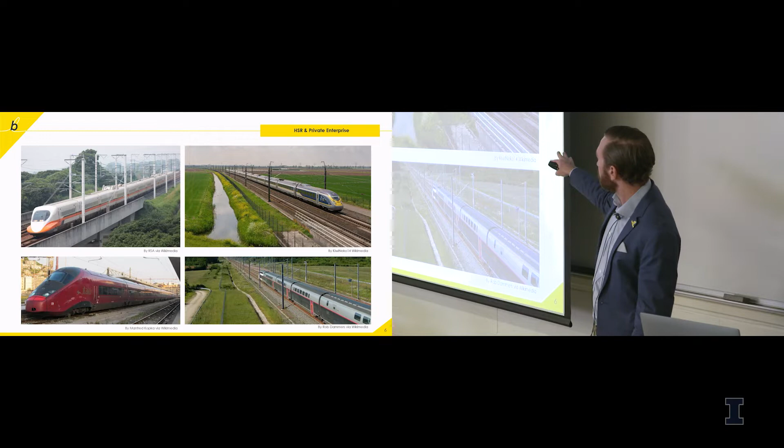Top left is Taiwan High-Speed Rail, which TC had a huge part in building. But some of these other projects also have major private components. This is the InfraSpeed line connecting the Netherlands and Belgium, built and operated by a private consortium. Same deal on the bottom right, the Tours-Bordeaux high-speed line in France, built and operated by a private company that charges tolls or track access fees to SNCF and other private high-speed rail operators that want to use it. And in the bottom left is Italo, a private company that operates trains on national infrastructure in Italy.

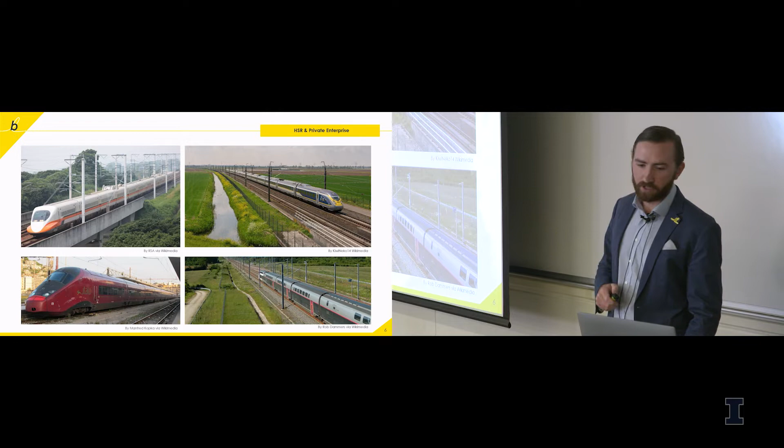Another theme from TC's courses was transit-oriented development, and how the arrival of high-speed rail in a community can really revolutionize a downtown area or develop a new one. That's something we've taken to heart at Brightline.

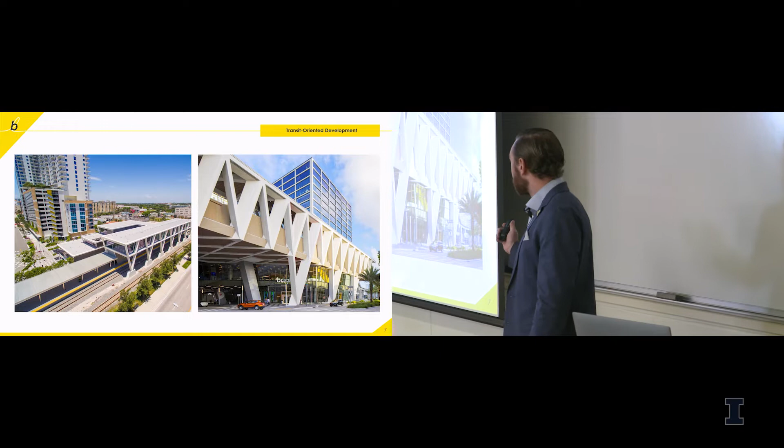On the left is our West Palm Beach station. The station's in the foreground, and in the background is a high-rise apartment building we built on land adjacent to the station that we own. So we can be not only your transportation provider, but also your landlord if you want. On the right is our Miami Central station, one of three towers that's an overbuild over that station, an office tower I'll talk more about.

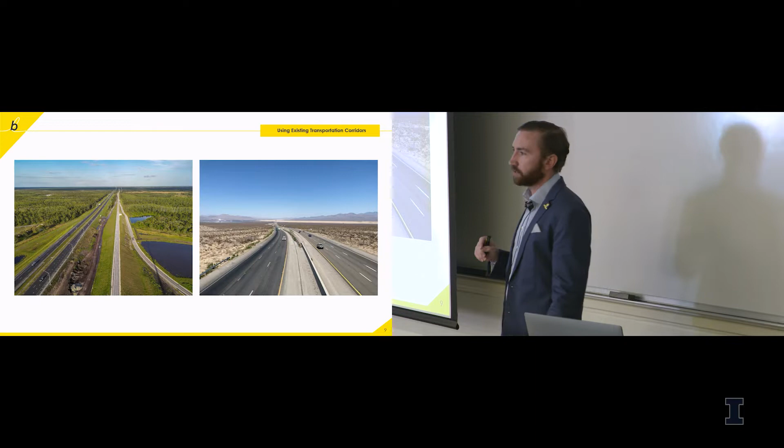On the right is the Interstate 15 corridor, connecting Las Vegas and Southern California, where we intend to build our Brightline West project, again following an existing transportation corridor so we only have one major property owner to work with. In fact, we just announced last week that the one mile of our project not in the I-15 corridor was acquired. So we're now 100% done with land acquisition for Brightline West, a huge step. We're the only high-speed rail project in the country completely done with land acquisition, which is part of what makes us able to truly say we are construction ready, shovel ready.

So let's dive into Brightline Florida a little bit, starting with phase 1, the operation we're currently running. As Chris said, we started in 2018 between Miami and West Palm Beach. This is a 67-mile route with 178 grade crossings, and we're operating today with 34 to 36 trains a day, hourly departures in each direction between Miami, Fort Lauderdale, and West Palm Beach.

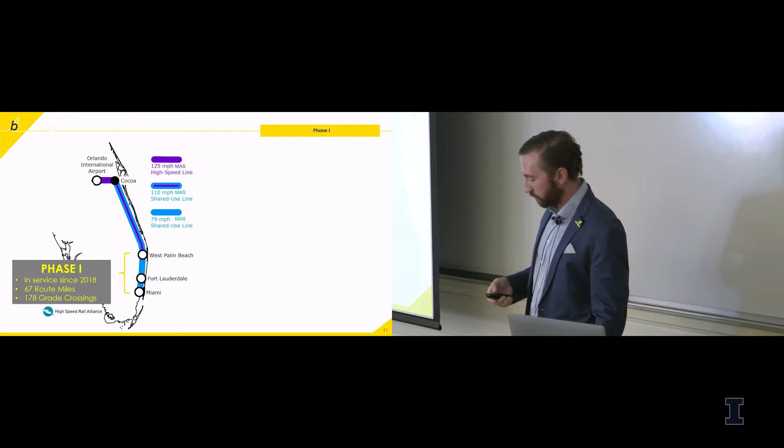Like I said, we're typically operating our trains with 4 coaches. One is the premium coach, which has a 2x1 seating configuration. The ticket in premium includes free snacks and drinks for the guests, and there are premium lounges in each station that also have buffet food and plenty of drinks.

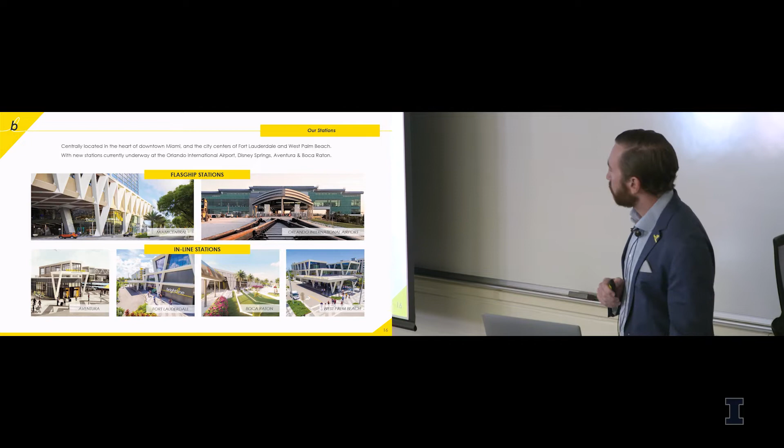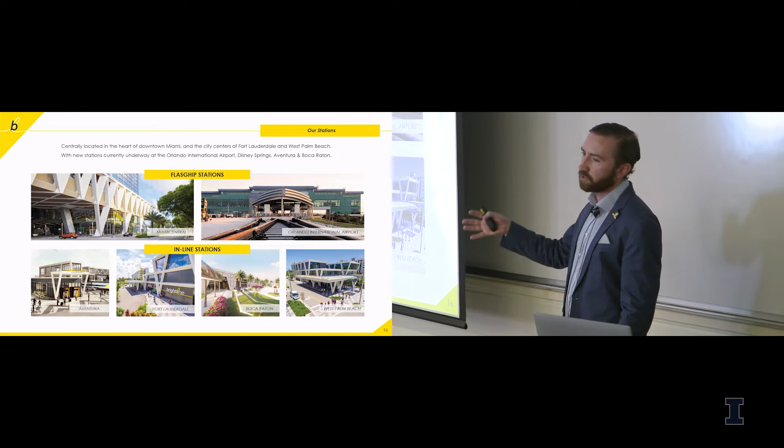Speaking of stations, these are great trains, but we connect great stations using those trains. Right now, Miami Central, Fort Lauderdale, and West Palm Beach stations are in operation. We're in the process of adding 2 inline stations, one at Aventura, Florida, on the northern part of Miami-Dade County between Miami and Fort Lauderdale, and another inline station at Boca Raton, between Fort Lauderdale and West Palm Beach. Both of these stations should be done at the end of the year. And of course, we're also extending to Orlando, and that station will open next year when our extension is complete.

We do have ticket gates for our trains, so for safety and security reasons we can keep a close track of who's on the train in case an incident occurs. We also have what I'd call Security Light, a baggage scanner for folks' carry-on bags that checks for firearms and weapons and things like that to keep our customers on the train safe. You can also check luggage on our train if you prefer.

So that's our operation in phase 1 - again, operating today, hourly frequencies in both directions. You are more than welcome to come down and visit. I'd love to see you on board, and we'd be happy to host you anytime if you want to come check it out. But now I'm going to switch gears and talk a little bit about phase 2, our expansion to Orlando.

Phase 2 is a $2.7 billion investment. As of this week, I think we're at 84.4% complete. We've worked over 6 million man hours on the project so far, and we've got 1,000+ headcount on the job every day.

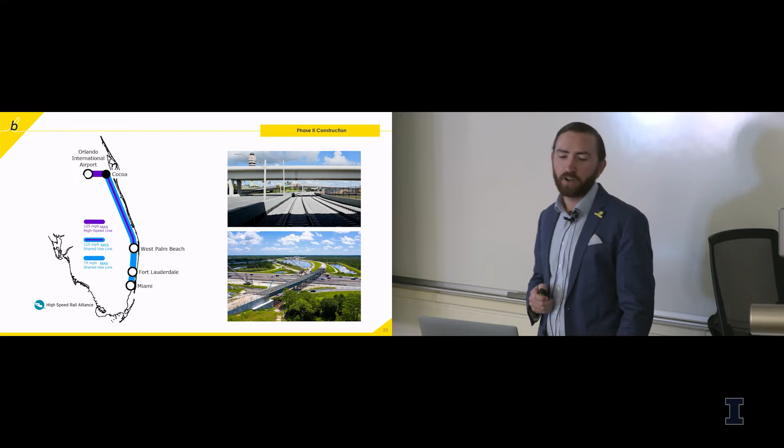Looking at the map, I like to use this high-speed rail lines map because it shows the train speeds and which parts of the corridor are shared. Starting at the north end at the final destination, Orlando International Airport, the first part of the project is split into 3 zones that we call zones 1, 2, and 3, currently under construction. Together they're about 40 route miles, and this is new build with train speeds of up to 125 miles an hour, meaning it has no public grade crossings. We can't operate through public grade crossings at speeds above 110.

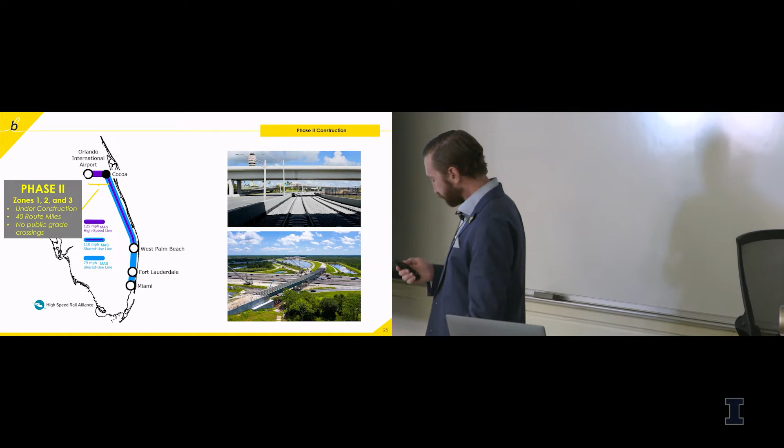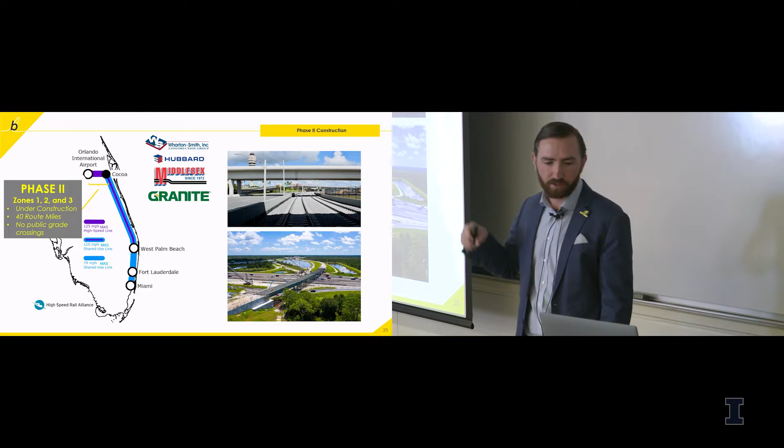Our main contractors for that work - for Zone 1, the vehicle maintenance facility where our trains will be maintained, Hubbard did the grading work and Wharton Smith did the vertical construction. For Zone 2, which is the track through the airport, that was built by Middlesex. And Zone 3, the actual higher speed portion from the airport over to Cocoa, about 36-37 miles, was built by Granite.

Servicing. This facility also has a fuel farm, sanding facility, wheel truer, and a locomotive repair track that has a crane capable of installing and removing the prime movers for the locomotives, the Cummins engines. So it's really everything you need to maintain a top-notch high-speed rail fleet.

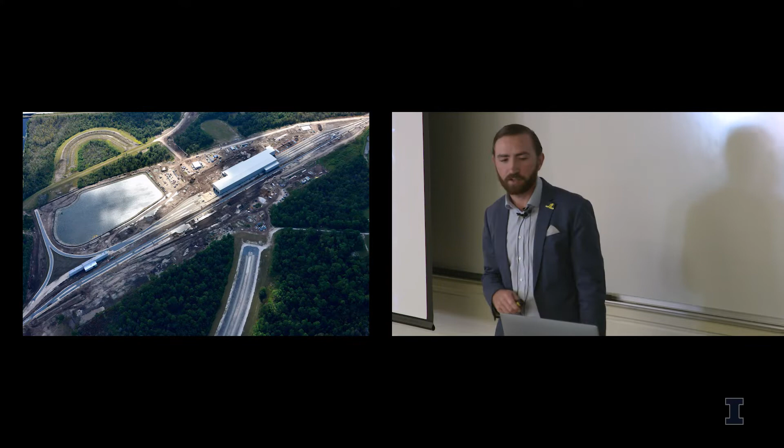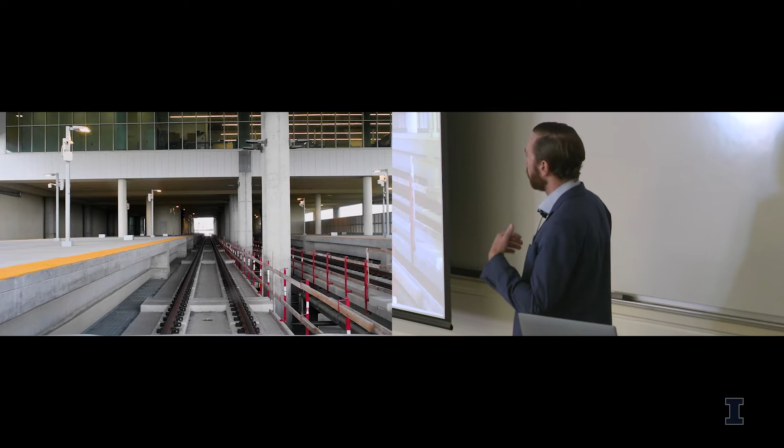Here's a photo of the track through the airport station itself. This is just when construction was being completed. Now we're working on the decorative finishes for both the platform as well as the station area and lounge. So this will look a lot different if you come down and ride next year when we're done.

Zone 2 is again the track through the airport. This is the track leaving. This is the train station here on the left in the background, leaving, coming to the north to head to the 528 expressway. Also in the background is a new Terminal C for the Orlando airport. This terminal is brand new, they just opened last month, and has a direct connection to our train station.

The airport, which is run by the Greater Orlando Aviation Authority, has been a fantastic partner that really has a vision for both intercity and local rail in Orlando. And so they actually built most of the train station. We only had to build the track part of it essentially. And they've had a vision for a rail connection to the rest of the state from their airport for a long time. Our agreement with them basically allows us to build the track through their airport in exchange for us also building a wide enough guideway to accommodate commuter and light rail in the future.

And so this grassy area you can actually see here is set, and where we're standing has the structures, the bridges and tunnels in place to add commuter and light rail in the future. So this is really going to become a multimodal hub for Central Florida once our train service opens and once those future local rail projects are constructed.

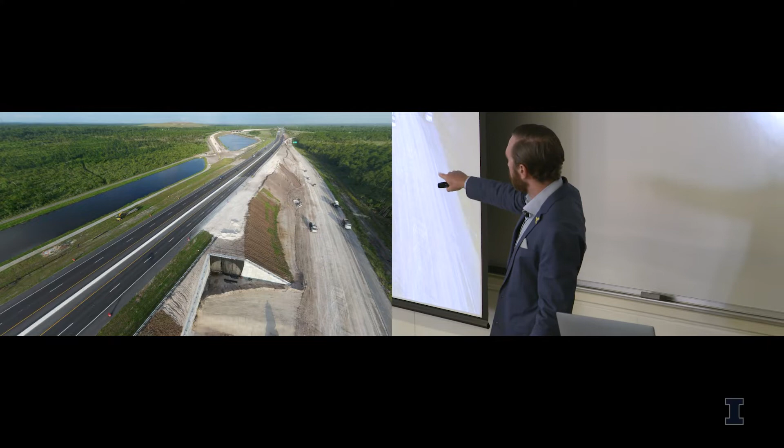Something else unique about Zone 3 is some of these structures that we've had to build to cross over or under freeways. So this is an arch tunnel where we will fly underneath the 528 freeway, and then in the background is a bridge over Interstate 95. It's quite a process to build some of these structures.

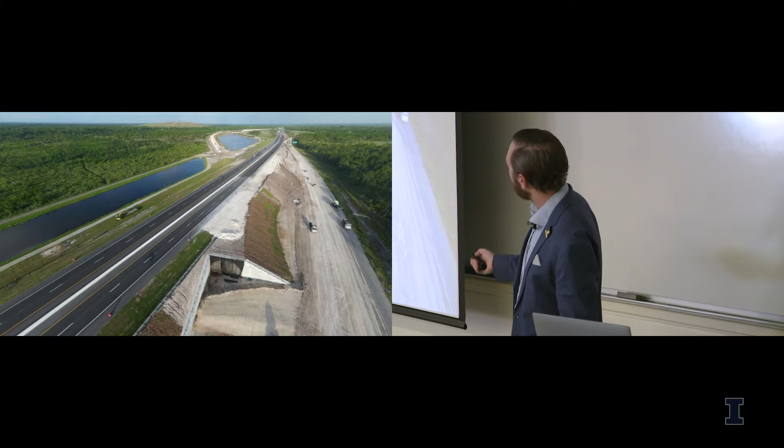On the far right you can see this compacted fill area where we actually built the shoofly for the freeway. The highway lanes temporarily ran here while we built this tunnel, and then this photo was taken just after we paved the new lanes over the tunnel. So now the highway is again in its final configuration, and it's all ready for us to build track underneath.

So that's zones 1, 2, and 3. The rest of the presentation I'm going to focus on what I'm working on mainly, which is zone 4. That's the biggest piece of the phase 2 expansion.

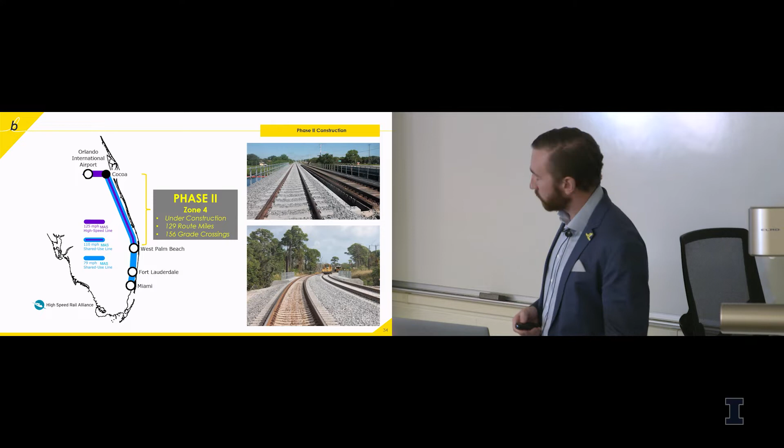It's 129 route miles, and this is the project double tracking the existing Florida East Coast Railway corridor between West Palm Beach and Cocoa. It's 156 grade crossings, which I'll talk more about, and we'll be able to operate at maximum speeds of 110 miles an hour on this corridor.

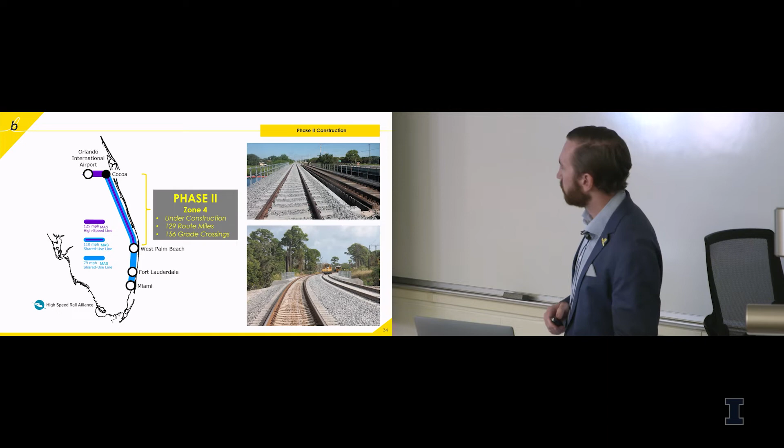And again, we are double tracking essentially the entire thing. There's only a few thousand feet over a very long bridge in Stuart, Florida that we can't double track. So there'll be one short piece of single track, and the entire rest of the line from Cocoa to Miami will be double track when we're done, and in some cases triple track.

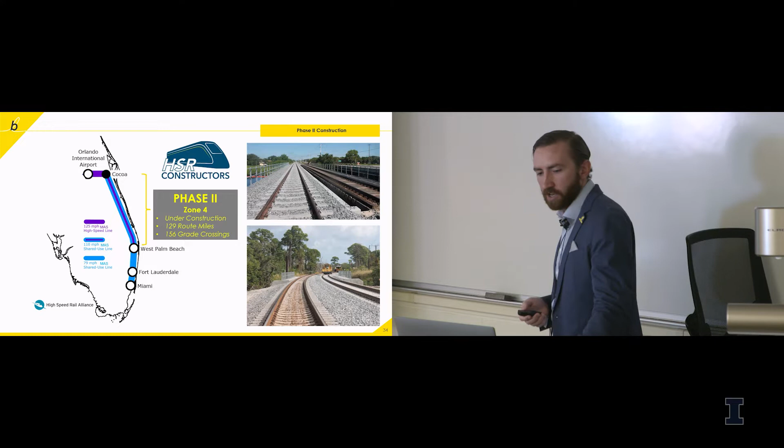This work is being done primarily by HSR Constructors, a joint venture of Herzog, Stacy and Witbeck, and Railworks. Those are three major track construction contractors in the U.S., and they're building that piece as well as doing the track work for Granite from Cocoa to Orlando.

So jumping into Zone 4, I want to cover a couple different aspects: first the track work, then we'll talk a little bit about grade crossings and a little bit about bridges. Again, this is what I work on day to day, so I'm most excited to talk about it. Also, I know there's some students in here who are taking the Shared Rail Corridor class, so I figured it's timely to dive into a little more detail on that.

I did speak at the TIE Symposium in April or May, and that presentation is on YouTube, so I don't want to duplicate what some in the room have already heard. If you're interested in learning more about the quantity of ballast, ties, fastenings and things like that we're using for the project, I'd encourage you to go to the RailTEC YouTube and watch that video.

Because I'm not going to cover it again here. Instead, I want to talk more about some of the unique things we're doing because we're working on a shared rail corridor that we wouldn't be doing otherwise for this project.

So just to give you the high level of what's going on, we're dealing with one existing Florida East Coast Railway track. Again, it's a single track route with passing sidings. To get from Class 4, where they currently operate, to Class 6, which is what we need for 110 miles an hour, we have to rehab that track.

So we'll do tie replacement, spot tie replacement, installing new ties, replace rail where we need to, replace fastenings where we need to, and then build that new second track, which is what you see there on the left. That's got all new ties, 136 RE rail, and new ballast.

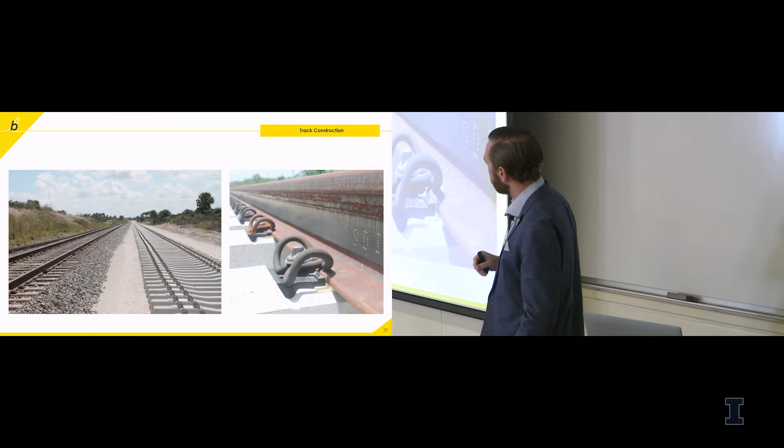Basically, we compact the subgrade, add the subballast, compact that. We lay out ties, usually with the tie dragon. And you can see in the far left of this photo, there's some CWR rail laid out that's been dropped by the rail train in advance. The next step is for a speed swing to come, thread that rail over, and we'll clip the new rail to the ties so that you have skeleton track.

Once the track is skeletonized, the next step is to bring the work train in with ballast, place ballast on the skeleton track, and then surface it up to its final elevation or configuration. I don't have a picture, but actually the most important step is the de-stressing, which sets the rail at the right neutral temperature once you have the track at its final alignment.

Pulled a couple screenshots from the track chart. I know this is a lot, but I want to point to one specific area. This orange line at the top is the existing condition of the Florida East Coast track before we started construction. You can see it's all single track.

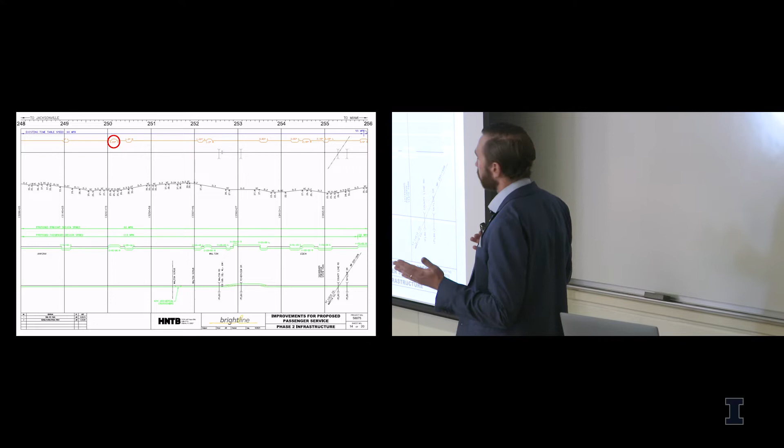Right here is a very typical location where we have a 2-degree curve. 2 degrees of curvature is too much for us to operate at 110, so we need to reduce the curvature. You can see circled there below, we need to make the curve a 45-minute curve, so that's about 3/4 of a degree.

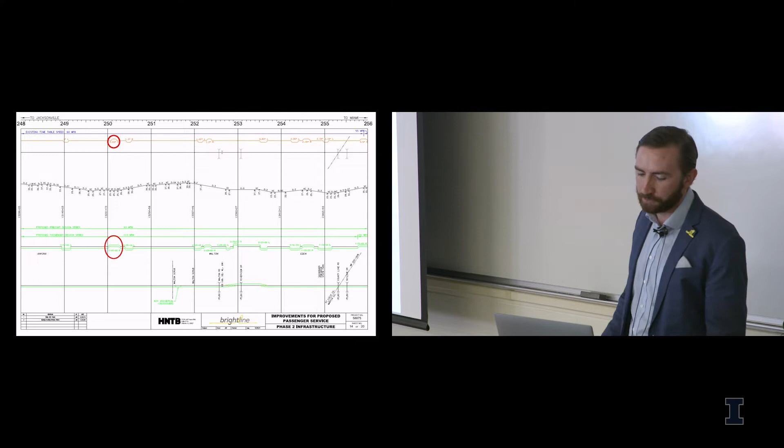Where I've circled here, you can see there are 2 lines, the black, which is the existing track, and the green, which is the new track. Here we've come and built the new track to design to the new curvature, so that's again about 3/4 of a degree, and the existing track is still at a 2-degree curve. A few weeks later, after we shift the existing track, now you can see the existing track matches the new track, and they're both at the new curvature.

This is a location down in St. Lucie County where we're actually going to start testing trains at 110 on Monday.

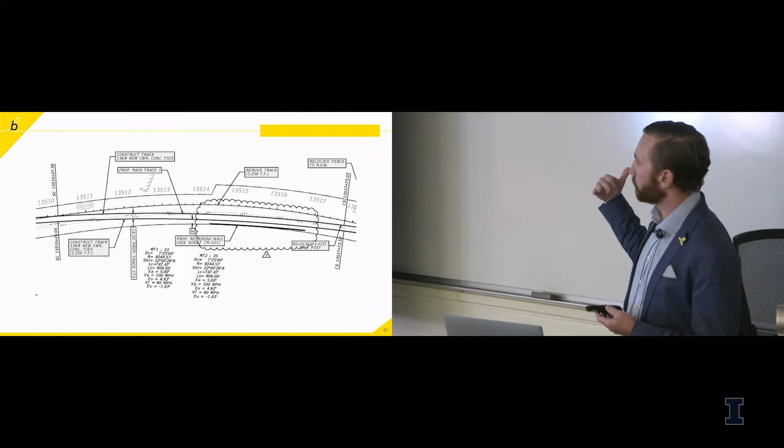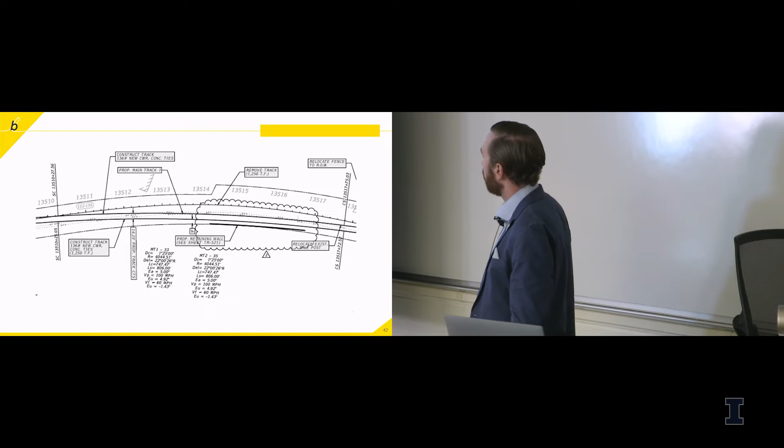Similar thing here, we're working with the property constraints that we have from the existing Florida East Coast Railway. Everything's being done on their property, so in some cases to get those speeds, we're shifting essentially all the way to the edge of the right-of-way. Here you're seeing the 2 new tracks that are coming basically as close as possible to the existing right-of-way line. That bold black line is a wall.

Another thing that we have to do a lot of is swap overs. All the bridges on the line are existing single track bridges, but we need double track. So what we typically do is build half of the new bridge right next to the existing bridge. Then we'll take a day where we can get an outage and we'll tie the existing mainline, throw it over and cut it into the new bridge so that freight traffic starts to run on the new bridge. That gives us a chance to come in, tear out the old bridge and rebuild it so that the end product is a brand new double track bridge.

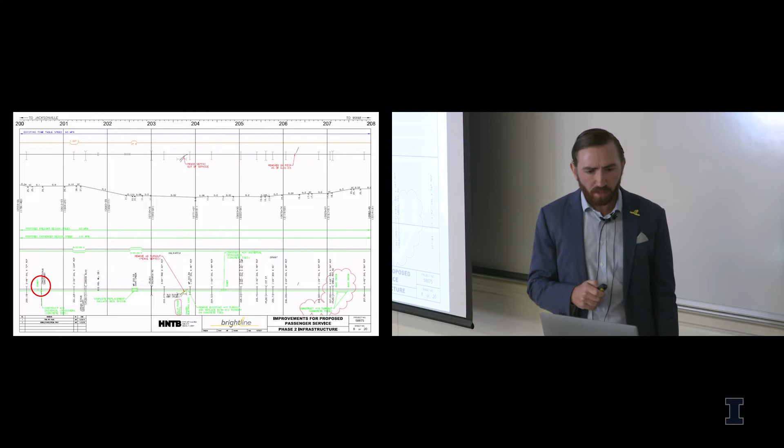Something else that's unique about shared rail corridors that we're doing a lot is adding tons of crossovers. I think we have 42 or 44 total crossover turnouts. These are all number 24s that have a diverging speed of 60 miles an hour, so freight trains can actually maintain full speed even when they cross over between mains. Our trains will have to slow down from 110 obviously, but 60 is still pretty good.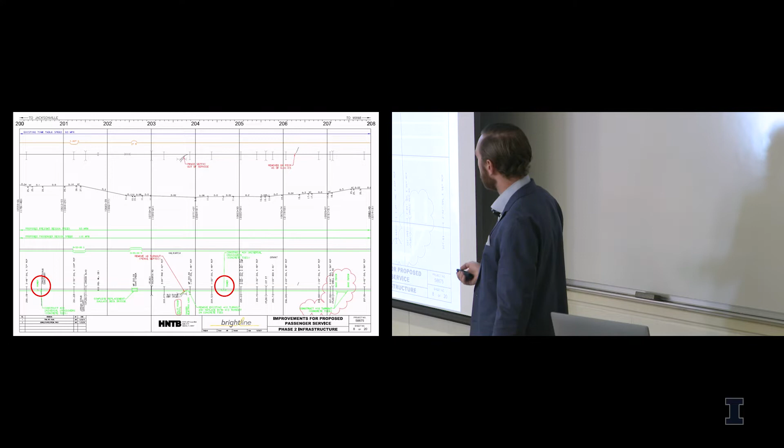And we're placing them at frequent intervals. So when the project started here, you can see they're at about 4 mile spacing. Typically they're at 6 or 7 mile spacing.

When the project started, there was quite a bit of RTC modeling work that went on, us and FEC together in the room trying to get the best configuration possible for the infrastructure so that we could operate both freight and passenger efficiently over the line.

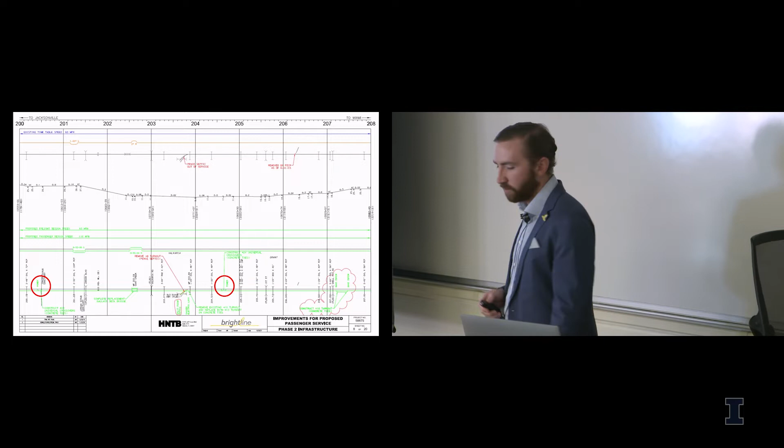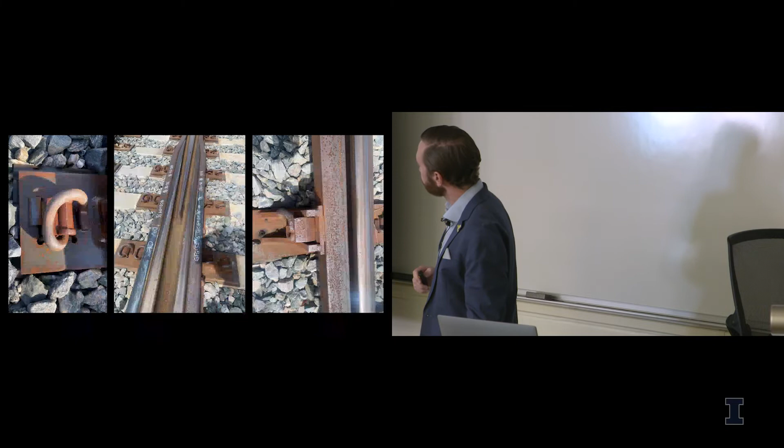One thing you'll find frequently as a problem on shared rail corridors in North America, and we're no exception, is heavy point frogs. Freight railroads tend to prefer heavy point frogs because they have a longer wear life. They call it a heavy point frog just because the frog point here is wider. That's great - FEC is no exception, and you get a longer, better value out of your frog when you have that heavy point frog. The problem is because of that wider frog point, it's harder to meet the FRA required tolerance for guard check gauge, which is 54.5 inches.

As a result, we've been giving our crossover turnouts a lot of TLC. You can see some shims on the far left on the tie plate as well as shims in the guardrail. There's a lot of fine tuning going on to make sure the frog is in the perfect spot, getting the guard check gauge within tolerance while also keeping the track gauge and the guard face gauge in the right place. Again, this is a problem for shared rail corridors all across the country.

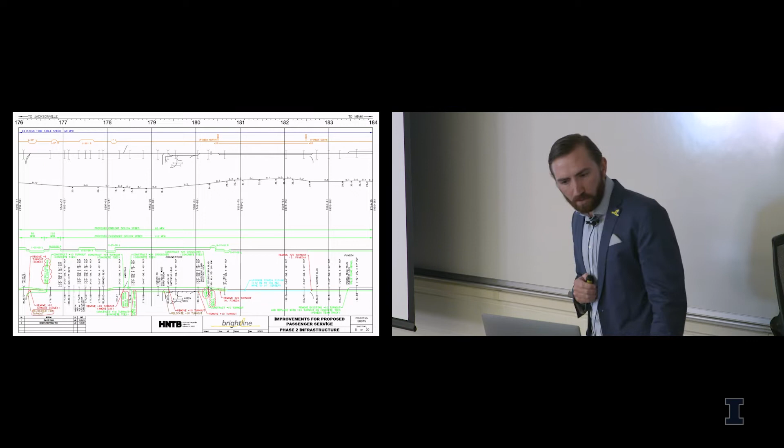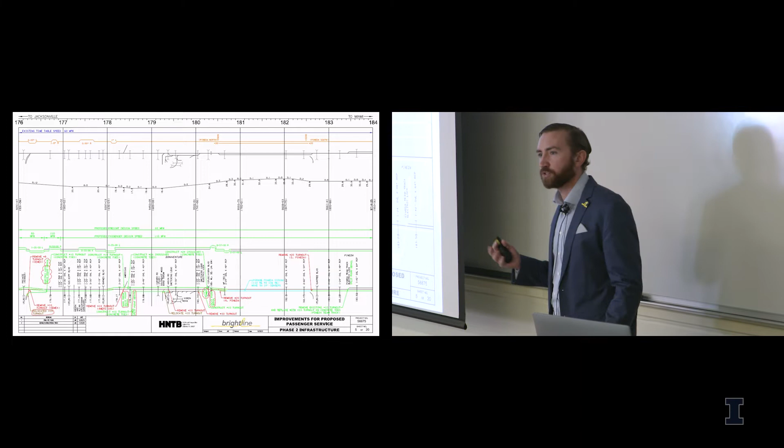One more thing I'll point out in terms of track work is we have to accommodate local traffic. FEC has a lot of online customers they serve, and we need to make sure local train operations can continue reliably without interfering with our operations, and vice versa. That means adding infrastructure.

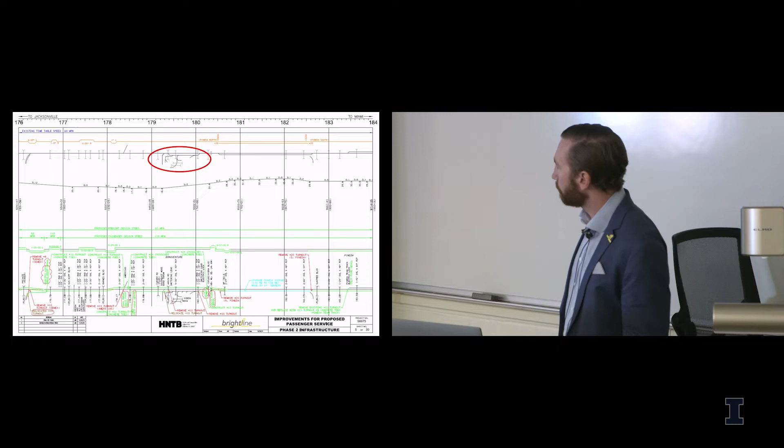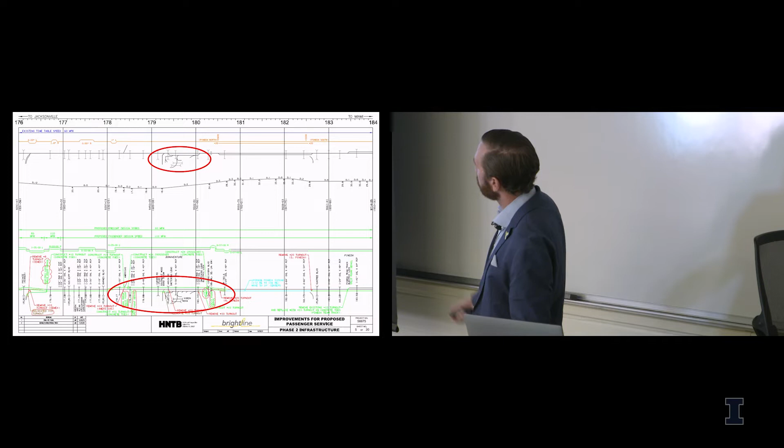In this example, this is the Bonaventure switching lead in Bonaventure, Florida. We'll add the new second main, but we'll also extend the switching lead so it serves this one last customer that's not on the lead, and also gives the local train more space to work and sort cars without fouling the main lines, so mainline traffic can continue to operate even while the local train serves those customers.

So that's track work. I'll cover crossings really quick too. I gave an RailTEC seminar about grade crossings recently, so I won't go into huge detail here since you can go back and watch that, but I'll touch on the construction process.

It starts way before we ever get in the field, doing a lot of hand-in-hand collaboration with all the communities on the line—20 plus cities on our route, 6 counties, and 2 FDOT districts. We need to coordinate every design, every aspect, with every single one of them, which has been a huge process we've worked on for years. We just finally received the last construction permit for the last crossing two weeks ago, so now they're all permitted, which is amazing.

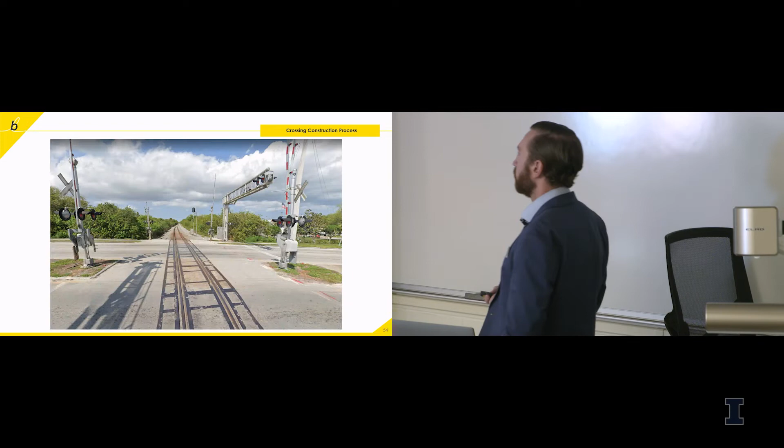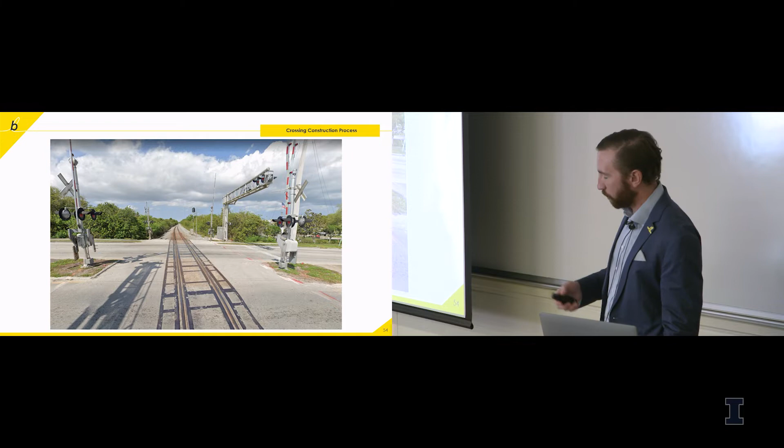That's great too because we're about 85% done on crossings, so we're down to the last 20 or 30—all the others are done. Doing all this crossing work requires a ton of media communications: communicating crossing closures, detour information, and the safety improvements we're putting in. Some of these larger crossings can have closures lasting 10 to 14 days because there's so much work to do, so it's a challenge for the public, and we need to communicate exactly what's going on, as well as the detour routes when we reopen.

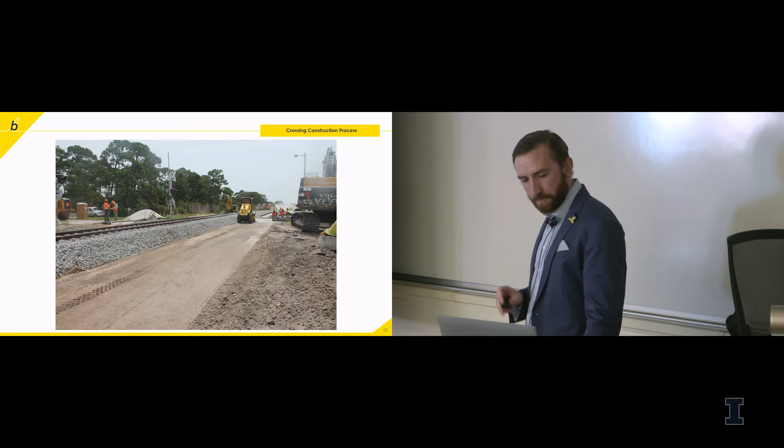Typically when we're doing a crossing, this is what you start with: a single existing FEC freight rail track. We come in, close the crossing, tear out the roadway. In this case we're not touching the existing main line, so it just stays in place and freight trains can continue to operate. We dig down, compact the subgrade, add the subballast, compact that, and test it all with the nuclear density testing gauge. Then we bring in the new track panel, flood it with ballast, surface it up, get it aligned, and then it's ready for the crossing panels.

That's an easy one. The hard ones are where we have to adjust the existing geometry of the mainline track through the crossing, often to achieve curvature more favorable for high-speed operations. Or, as in this picture, this is another location where we're adding the second main to the right and then another switching lead after that, so we need to shift the existing main over to the east side of the right-of-way.

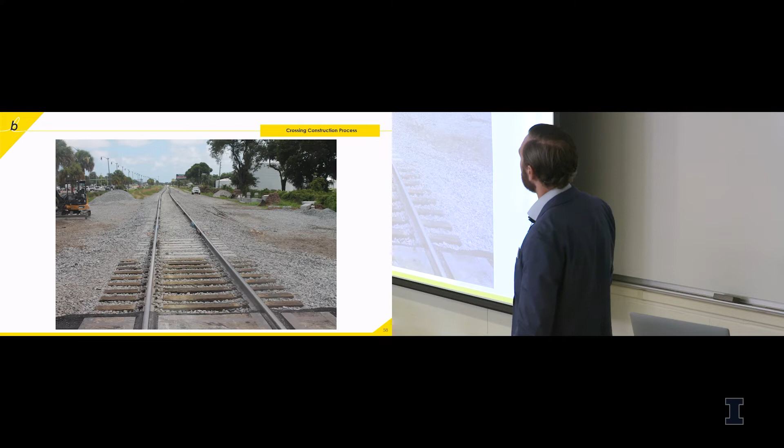The crossing work typically precedes the track work—it's a longer lead item. So here we shift the track over in the crossing while redoing it, then put a temporary S-curve alignment in the existing main line until we can come back later and shift the rest of that mainline track. We always build the temporary alignments to be good for the maximum freight speed, which is 60 miles an hour.

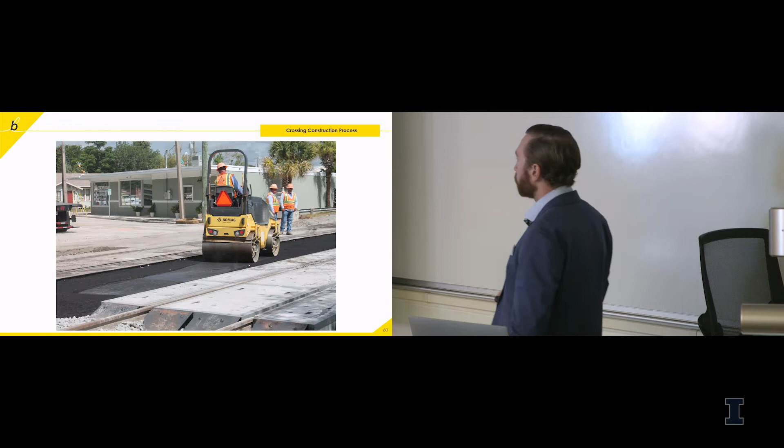Sometimes we also have to replace the existing mainline track panel in the crossings. Some of these crossings have a lot of truck traffic, so the crossing doesn't last that long, maybe 7 to 10 years, and some are at the end of their life when we show up. We have to tear the existing track out during a mainline outage, put in a new track panel, flood it with ballast, surface it up, and get it back in service for freight trains after just a 4 to 6 hour outage window. Once the panels are on, we do the asphalt paving, striping, and there's usually a lot of associated curb and gutter work, drainage structures, as well as sidewalks that we have to place.

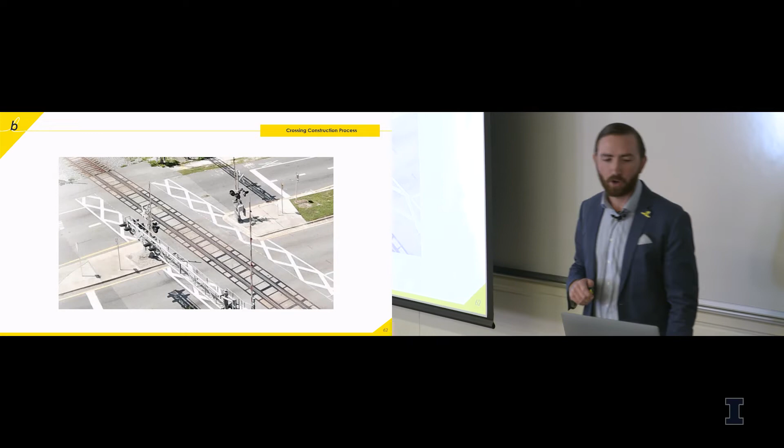We're also placing these dynamic envelopes at every crossing. This is something FDOT asked us to do. They're designed to make drivers more aware of where the dynamic envelope of the train is, to try and deter drivers from stopping on the tracks.

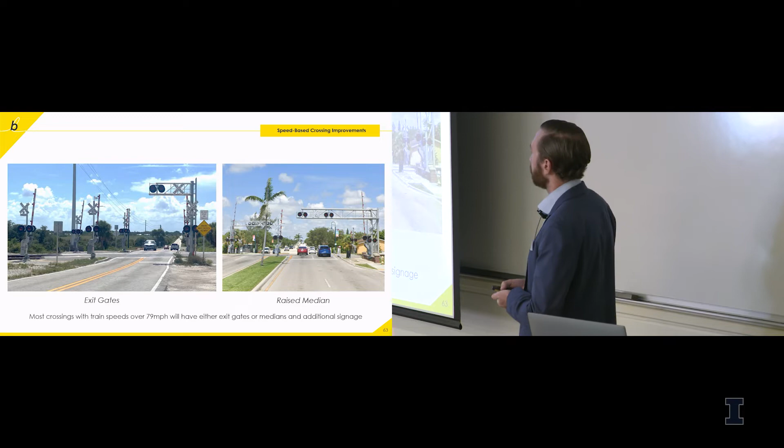Also, because we're operating at speeds up to 110, there are additional safety improvements required at a lot of crossings. Nearly every crossing where we operate over 79 miles an hour is going to get either exit gates, so quad gates, or raised medians, or both, to deter drivers from driving around the gates when they're activated.

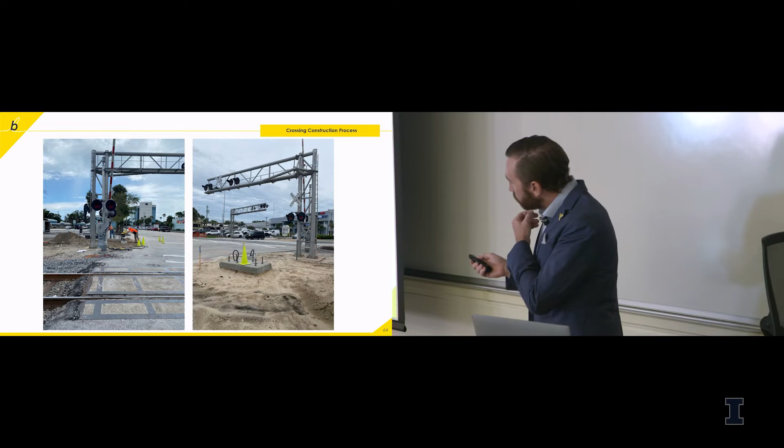A lot of signal work at the crossings too. Here you can see in this right picture, we're relocating that cantilever arm and the gate itself to the new foundations in the foreground, right here, so that we can move them out and make space for that new second track.

A lot of crossings we're replacing the entrance gates with new gates, also adding exit gates. Many of them we're also placing new signal bungalows, new battery boxes - these are batteries with backup power for the crossing - as well as generator cages. With the recent hurricane, it's pretty common now to add these generator cages where you can put a generator to power the crossing if you're without commercial power for longer periods of time, 2 or 3 days. The batteries aren't going to last, and generators get stolen very easily in a hurricane unfortunately, so you have to put them in these cages.

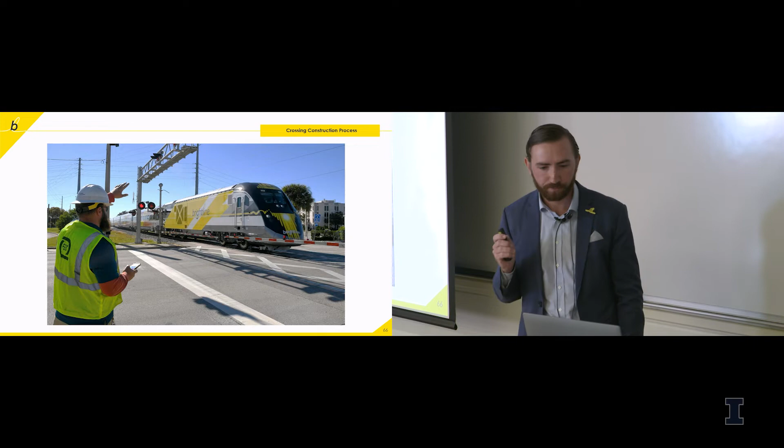The last thing to do, when you cut that new second track into service, is you have to time all the crossings again since you've rebuilt them. What we typically do is have flaggers at all the crossings, and we'll walk down the crossings with the flaggers long in advance of the train's arrival just to make sure no vehicle traffic is moving. Then we can test and time the crossings to make sure the gates and lights and everything meet the federal and local requirements. Plenty of challenges come with building these crossings.

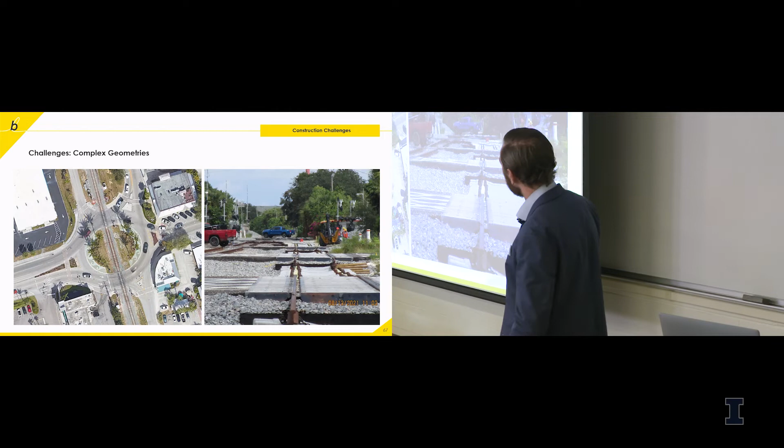There's at least 3 crossings that go through the middle of a roundabout, believe it or not. That's a lot of fun, because we have to modify the whole roundabout to make space for the second track - repave the entire roundabout, restripe the entire roundabout. But worse than that, this roundabout is here for a reason - if we could move it, we would. But it's a convergence point for a lot of main roads, so the detours are just miserable, and you end up getting pretty much massacred in the local media for closing this for 10 days.

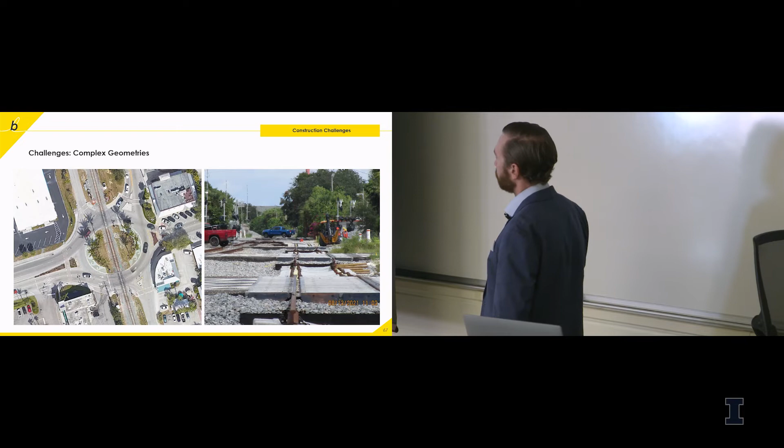On the right, complex geometries. So downtown Melbourne, where we've got about 7 crossings in the space of 3,000 feet, takes a really good surveyor to get those panels lined up right. You really have to know what you're doing, because you don't want to put all those in place and then find out later that they don't line up and the track's not going to be straight.

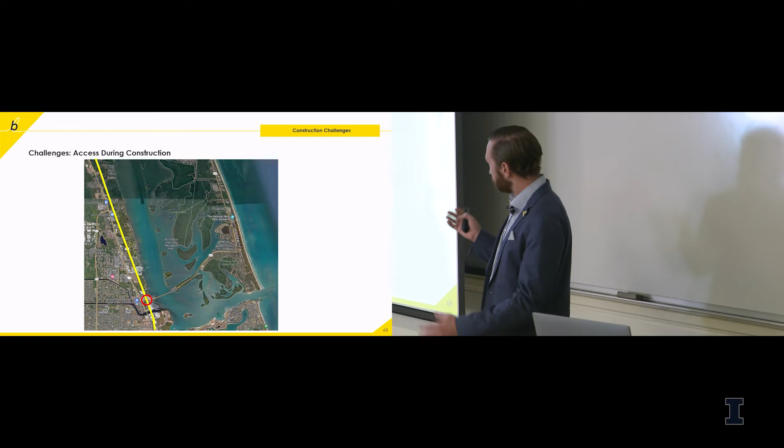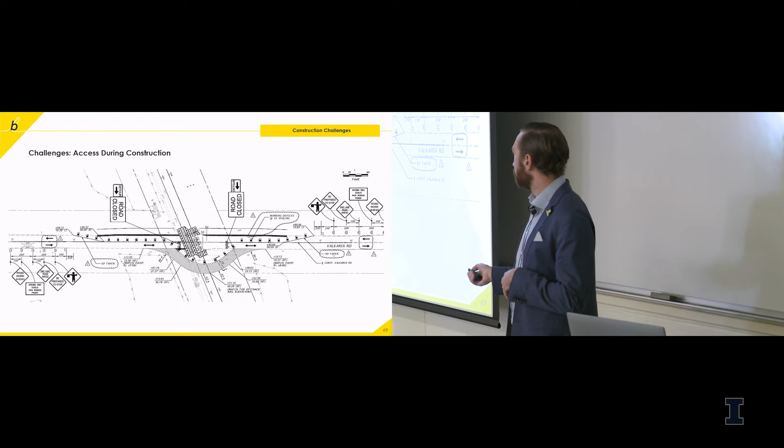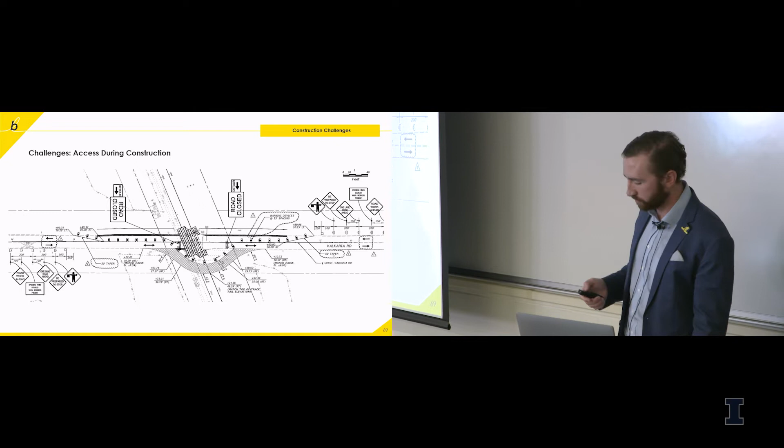That's no fun. Another challenge we have with crossings is access. The track follows pretty close to the Indian River, the Intracoastal Waterway, and a lot of places you could only get to the barrier island by crossing the track. So what we have to do in those cases is either rebuild half of the crossing at a time so that vehicles and emergency services can operate over the other half, or in the case of smaller roads, build a temporary crossing like you see at the bottom here, where for the whole crossing closure, even if it's 10 or 14 days, we have flaggers out flagging traffic, stopping traffic for trains while we rebuild the main crossing. Lots of fun. That's what one of those temporary crossings looks like.

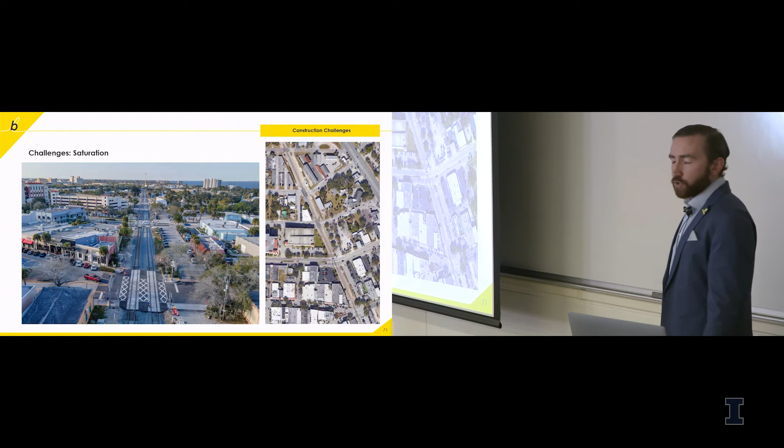Another issue we have with crossings a lot is saturation. This is downtown Melbourne, with all these crossings in a row. Each crossing has a physical approach circuit, and each of those approach circuits is associated with a certain AC frequency. We have AC crossing circuits and a DC track signaling system, and there's only so many AC frequencies you can use for crossings. In a place like this, there are so many saturated crossings that it requires really specialized signal design.

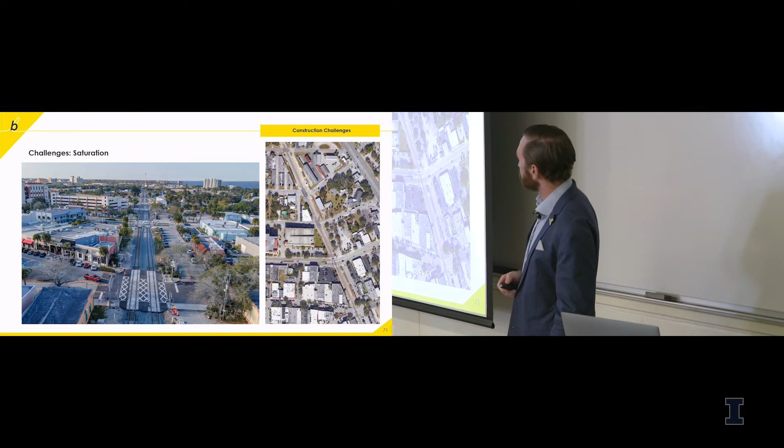We have to have preemption timing for all the traffic lights on adjacent roadways to clear queued traffic off of the crossings, and there are a ton of crossings with adjacent roadways. So that's a whole separate effort, preemption timing.

Last thing I want to touch on today before I close is structures. Between West Palm and Cocoa, there are a total of 30-some bridges. It's Florida, so there's a ton of waterways, and we are building a total of 28 new structures. A lot of these bridges we're tearing down and replacing.

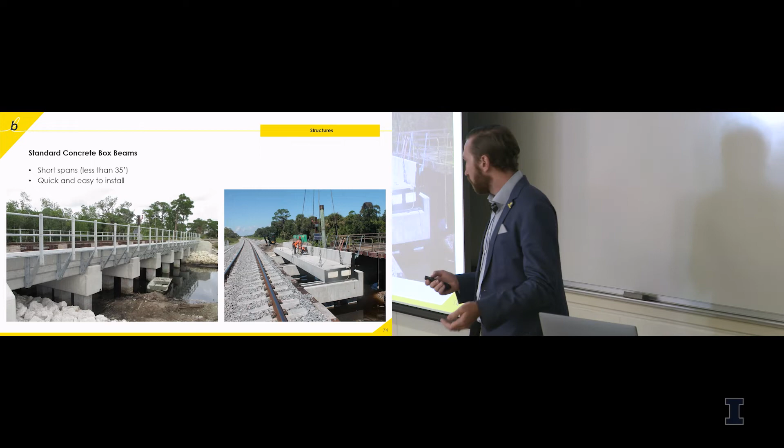For the shorter, smaller waterways, we're typically using standard concrete box beams, for spans of 35 feet and less. These are really quick and easy to install. A lot of these bridges we can build in 2 months or less, some in 1 month or less. They're really quick.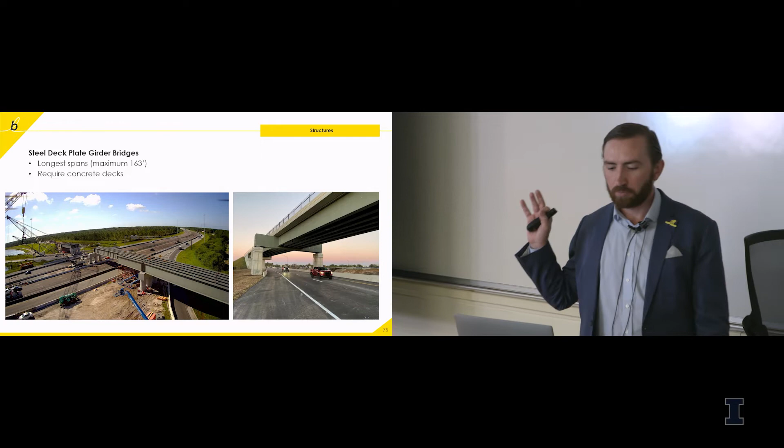At the other end of the spectrum, for those long spans, we need steel deck plate girder bridges. Our longest one on the project has a span of 163 feet, crossing over Interstate 95 -- that's actually on Zone 3, not Zone 4. There are places too where we're paralleling the highway and need straddle bents for the bridges, to accommodate the geometry of entry and exit ramps onto the highway.

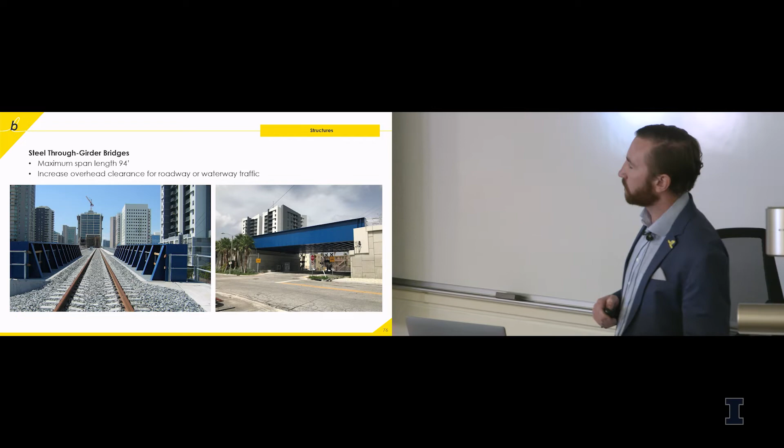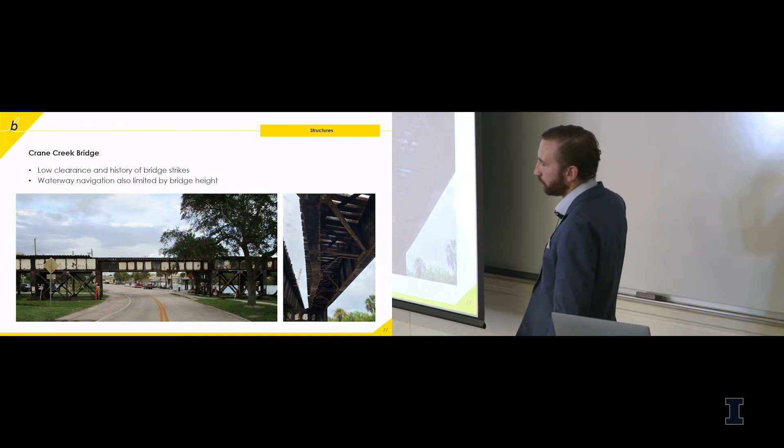The rest of them are deck plate girders. We've also got concrete I-beams on a lot of the station tracks. These are standard I-beams, very common in Florida -- like every highway bridge in Florida. The construction contractors know how to build them, and they know how to build them quick, so that's great. They do require separate concrete decks, and we're mostly using these on our station tracks.

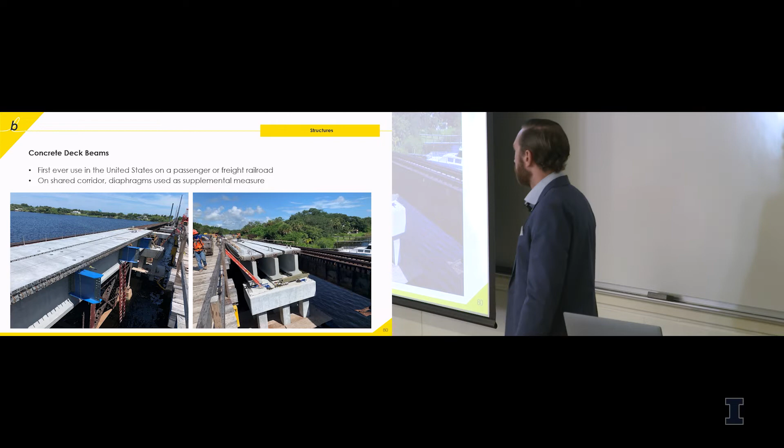We are doing something quite new with concrete I-beams as well, using ultra-high performance concrete for the closure pour on some of our bridges, which means no deck is required. I'll show you a photo in a minute, but basically these are the beams, and then we pour that ultra-high performance concrete in between the beams to connect them together, which forms the deck, and then we're putting ballast basically right on top of the beam. That way we don't have to pour a separate deck. It reduces the dead load on the bridge and makes the bridge quite a bit more economical as well.

FEC was a little suspicious of it, so they made us go back and put steel diaphragms to connect the beams together. So all of our bridges using this technology on the shared rail corridor have those diaphragms, even though it's really kind of a belt and suspenders measure. Our bridges on Zone 3 that use this do not have those, because we control our own destiny on our passenger-only trackage.

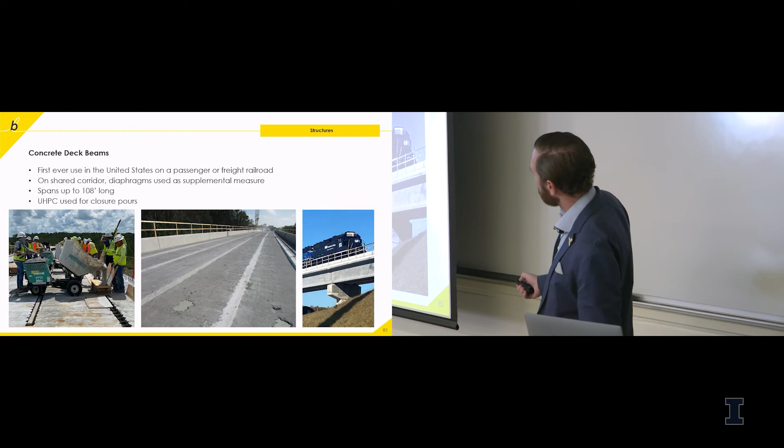Here you can see a photo of that closure pour going on. This is the ultra-high performance concrete. It's got a compressive strength between 20 and 24,000 psi as compared to 3 to 5,000 for more typical concrete, so it's amazingly strong. And here is one where the closure pour has just been completed, and this is basically ready for the waterproofing and then the ballast.

And finally, on structures, we need to touch on drawbridges. So this is Florida. There's a lot of waterways, a lot of boat traffic. Nobody's going to give up their waterways for us, and we need to keep these drawbridges in service. So we've got 3 drawbridges on the shared corridor, one that was in phase 1 in downtown Fort Lauderdale, that we rehabbed all the electrical and mechanical components for.

Phase 2, we've got 2 additional bridges on the shared rail corridor. One is Stuart, where we're also just rehabbing the electrical and mechanical for the drawbridge, as well as installing a new tie deck. That's that one piece of single track that's going to be left when we're done. And then the last one is the Jupiter drawbridge at the Loxahatchee River, and that bridge we're completely rebuilding. Got some pictures of it here.

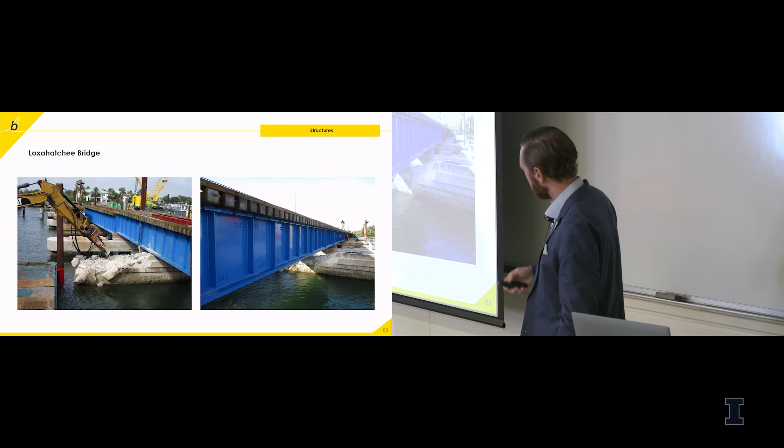We have to replace the spans 1 or 2 at a time. They sit on new bents that we installed underneath the live track, which was quite a process. When we install those new spans, we have to tear out the top piece of the existing spans all in one go, typically with about a 12-hour track outage window. So a lot of planning goes into that.

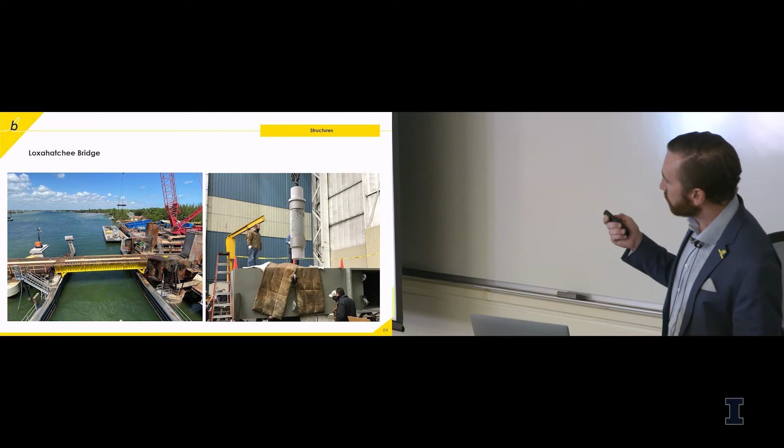When we replaced the drawbridge itself, what we had to do first was take out the old drawbridge in one 24-hour window and then put in this yellow jump span, which allows train traffic to flow, but it's removable, so we can take it out twice a day to let boat traffic through. We did that for about a month until we could install the new drawbridge.

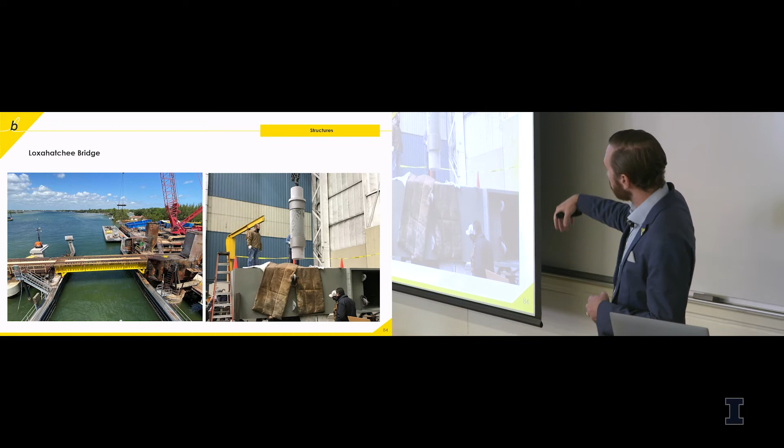What you're seeing here on the right is the trunnion for the new drawbridge. This is the counterweight box. Let's see if I have a picture of it. Yeah, this is the old counterweight box here. This is the new counterweight box laying on its side on the ground, and this is the trunnion that the bridge actually rotates on. We just pulled it with a crane out of a liquid nitrogen cooler to get it down to a low enough temperature that it would contract so that we could lower it into the counterweight box, and then as it heats up, it'll expand, fill out the counterweight box so that it can't be removed. So that's how you get the trunnion in the counterweight box.

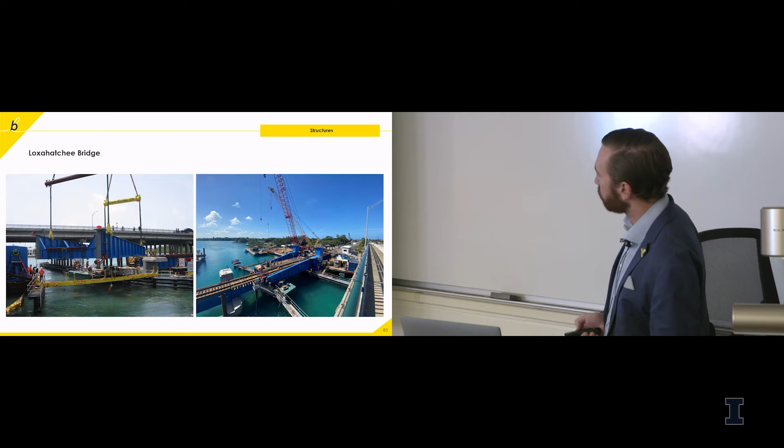Pretty cool, I thought. Here's the new drawbridge itself being lowered into place during another track outage window we got. And then it gets connected up to all the electrical and mechanical components and the counterweights themselves. Here's the first train going over the new drawbridge. Again, this was single track - it had originally been built as double track in the 30s, then got changed to single track in the 70s. Now we're making it double track again with all new bridge.

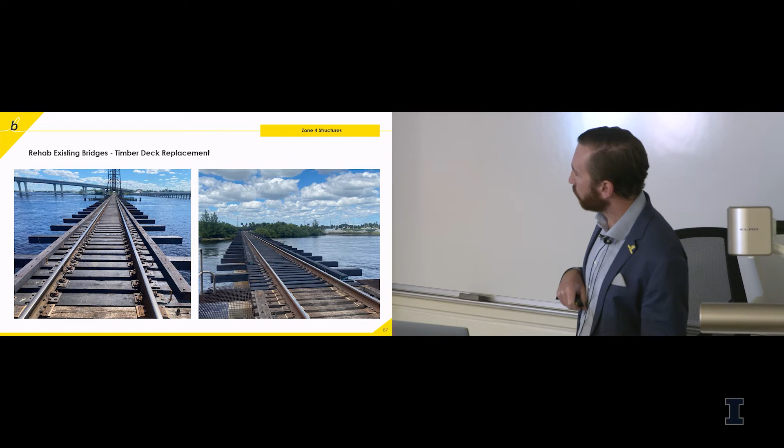I'm not going to talk about signal cutovers today. We're still in the process of that. Maybe that's a future presentation, I don't know, but a lot of work is going on the signal side to put the new track actually into service, get the PTC up and going, and then the high-speed testing, which, as I mentioned, we're starting on Monday. So stay tuned in the future for that.

But I just wanted to close by talking about the future of Brightline. I told you about phase 1, told you about phase 2 that we're almost done with. So what's next, right? The most immediate answer is Tampa. So once we're done getting to Orlando, the next thing we're going to start focusing on is going to Tampa.

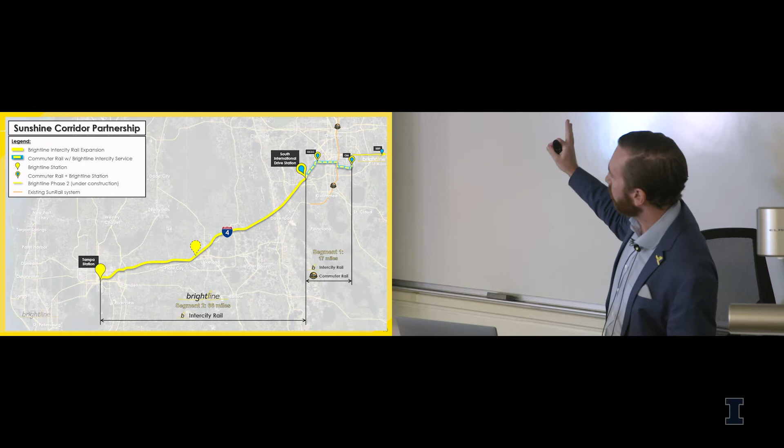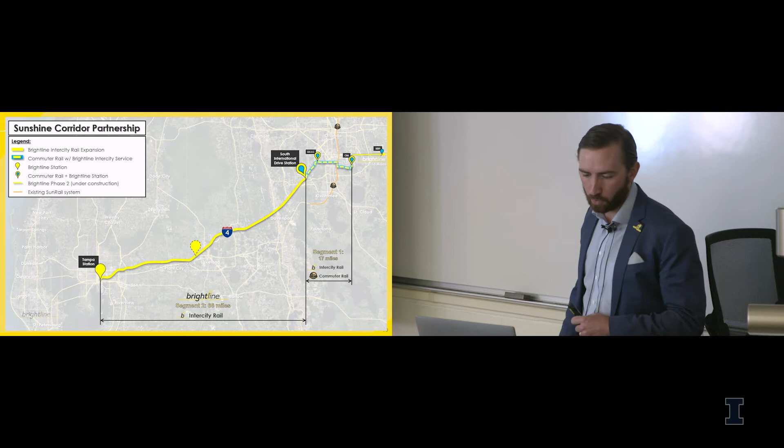Our alignment from the airport, which is on the east side of Orlando, over to the theme parks and the convention center, which is on the west side, is going to be a shared corridor with SunRail, which is a local commuter rail service. So they'll have frequent service on the line in addition to us. And then from there, we'll leave the South I-Drive station, which is right by Disney World, and run in the median of Interstate 4 all the way to Tampa. That, just like the rest of our operation, is going to be an hourly service connecting those two cities.

Beyond Tampa, the other thing we're really excited to start construction on soon is Brightline West, connecting Las Vegas to Southern California. This is going to be a true high-speed line with train speeds up to 200 miles an hour, fully electric train sets, zero emissions, greatly reducing the travel time between Los Angeles and Las Vegas.

And with that, I'd like to say thank you, appreciate you all coming and listening, and I'd be glad to take any questions if we have time left.

Let me start by thanking you, Tom, and knowing TC is somewhere smiling very broadly right now. This is exactly the sort of thing I think he would have loved to see his students working on. It's a fantastic accomplishment. Really appreciate that, thank you.

Can you flip on the lights there? I think it's the last switch. Oh yeah, I'm sorry, the other, no. Oh, I'm sorry. Let's try that. How's that? That's one more. It's the, yeah. All right, thank you.